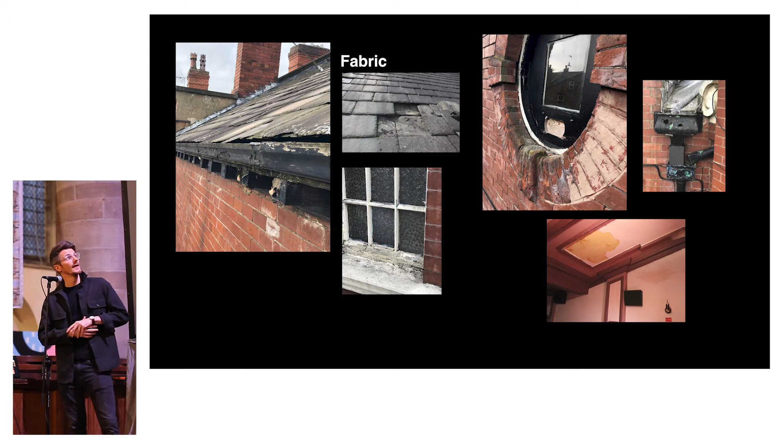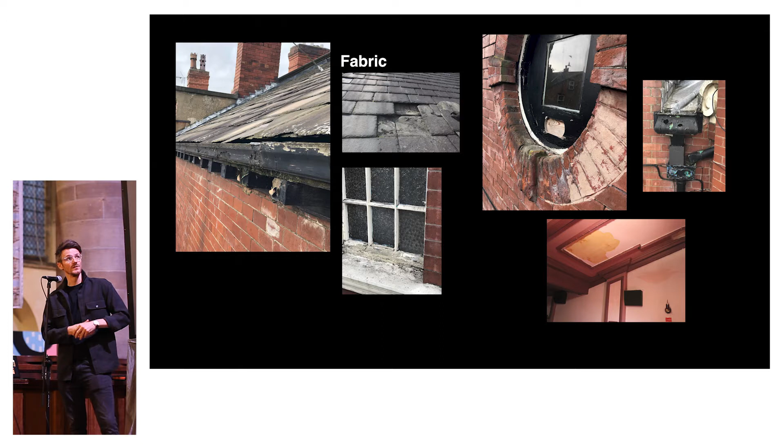They start to get a bit tired over the years, and no matter how well looked after the building is, or how much maintenance you do, parts of the built fabric are going to fail. So when the films are finished and the house lights come back on, it becomes apparent that there's plaster flaking, timber gutters around the roof starting to rot, leaky windows, cracks, and the cast iron rainwater goods starting to corrode. So we had to intervene to secure this building's future.

Above and beyond that, there's the question of comfort and the user's experience of the building. Although people love going there, it's thinking about the comfort of not just visitors, but the staff and volunteers in this building every day. It obviously gets freezing in the winter, roasting in the summer. Things like the uninsulated roof, the single glazed windows, and the outdated electrics, plumbing and ventilation need to be dealt with to bring it back into the modern day.

But fundamentally, what trumps all of this is the issue of access to the building. Hyde Park is not unique in this respect, but historic buildings just weren't designed to be accessible. It's easy to see that the picture house has a stepped main entrance, which isn't really acceptable in modern society — having people use different entrances just to get in if they have mobility issues or are a wheelchair user. So fundamentally, inclusivity and access is absolutely critical to the project, and that's what a lot of the redevelopment focuses around. But not just access into the building.

Once you're actually inside, things a lot of people would take for granted, like going to the toilet — in the picture house you have to go either down or up a flight of stairs, so it's obviously not ideal. Generally it is a cozy building, but that means it's small. The foyer space itself is tight for space. If you imagine quite a few people milling around the foyer, and you have access requirements or are in a wheelchair, it's not an inclusive environment if you're struggling to maneuver around the building. So fundamentally, this is one of the reasons we absolutely have to intervene with the project.

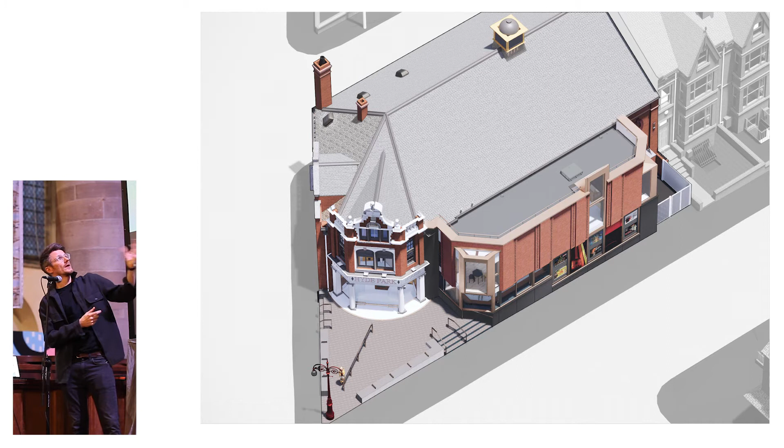So obviously there's work to the existing building that I've talked about — we need to look at the brick, the stone, the slate roof, and the lead work, all of that kind of stuff. But we're also proposing building an extension onto the side of the building on the Brudenell Road side, which is a 2-story extension above ground, with a basement level as well.

What you can see here is it's not just the extension we're building, but there's also key landscaping at the front of the main entrance to deal with the stepped access. Fundamentally, ramping the access to the front door of the building means we get level access for everybody to get into the building through the same front doors — democratic access.

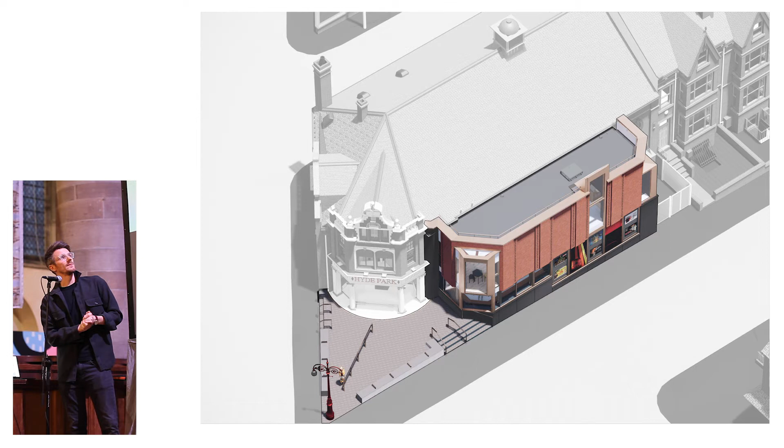The extension itself takes some cues from the existing building in terms of material and proportions, trying not to distract from the significance of the original building — that's the last thing we want to do — but trying to make this an appropriate piece of design sticking on the side of the building.

To take the lid off and look at the building on the ground floor, you can see the ramped access leads through a new glazed-in draft lobby, through the front door — these are all automatic opening doors — and you come into an enlarged foyer space. The way we're doing that is basically taking the rear wall of the auditorium and pushing it into the auditorium, sacrificing a couple of rows of seats for the benefit of increased space at the main entrance.

That gives us a bigger kiosk space for the staff and volunteers to work out of, but also allows us to fit in a new accessible WC in the foyer, right adjacent to the main auditorium, which was severely lacking in the original building.

We've also added a new acoustic lobby before we get into the auditorium, and the new ground floor of the extension adds additional spill-out space into the foyer, more space for people to spend time in the building without getting in the way. We saw the photos Wendy was showing of people queuing outside in the cold and the rain and winter — it offers a bit more space for people to actually spend time in the building.

Beyond that, critically important to the extension, you can see just beside the seating area that we have a new platform lift going in, which is going to give access to the basement level and also the first floor of the extension.

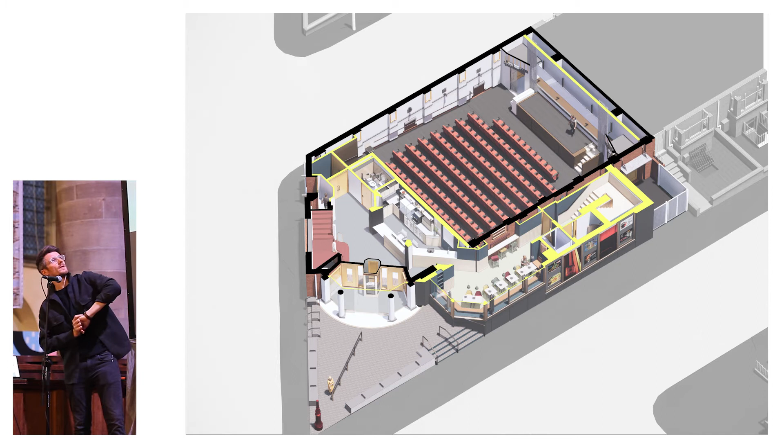You can see a yellow line at the front of the auditorium — that's a new acoustic lining to the front wall, which is a shared wall with the neighboring property. That's to increase the performance of the space acoustically, and it's going to be hidden behind the proscenium surrounding the cinema screen.

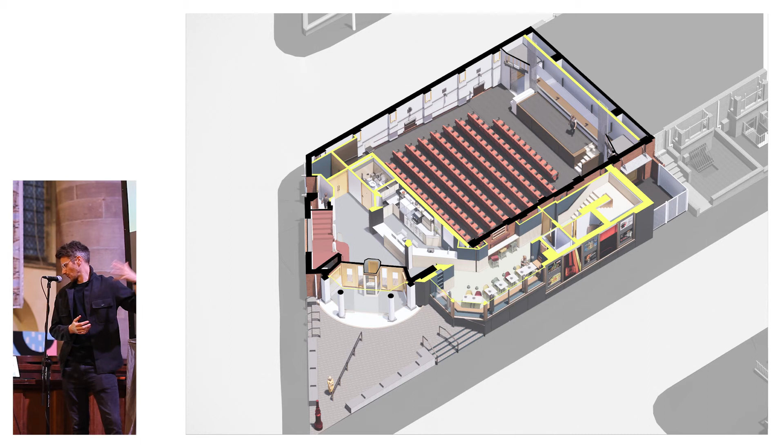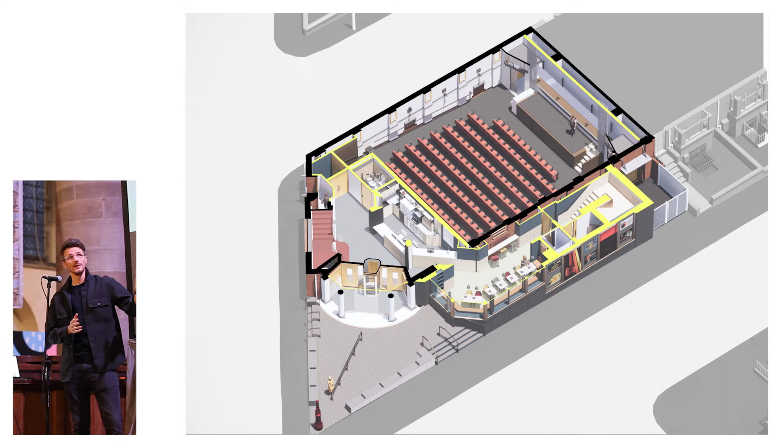What's quite nice to show in this diagram, something we're quite proud of, is that people can arrive at the building and go from the street right to their seat in the auditorium without having to touch a door, without any physical barriers — all of the doors from the main entrance through the acoustic lobby and into the cinema are automatic opening. It's really about opening up the building and letting people get to their seats without any physical barriers.

Jumping up to the first floor of the extension, there's a new public space at the corner, a flexible community space where they can hold other events, as well as additional toilets and storage space, with some nice feature windows looking out onto Brudenell Road.

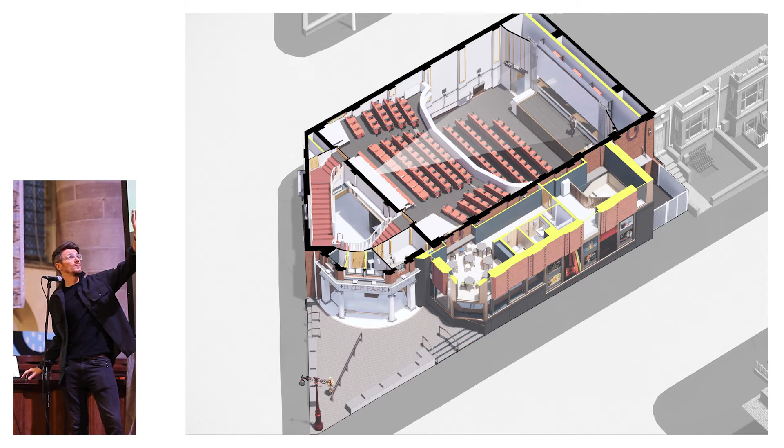Jumping down into the basement, one of the critical parts of the redevelopment project is excavating the basement to form a new second screening room, which is part of increasing the flexibility for the Picture House to have two screenings on at the same time.

This is a really specialist acoustically isolated box within a box, which allows two screenings to happen at the same time with the auditorium directly above.

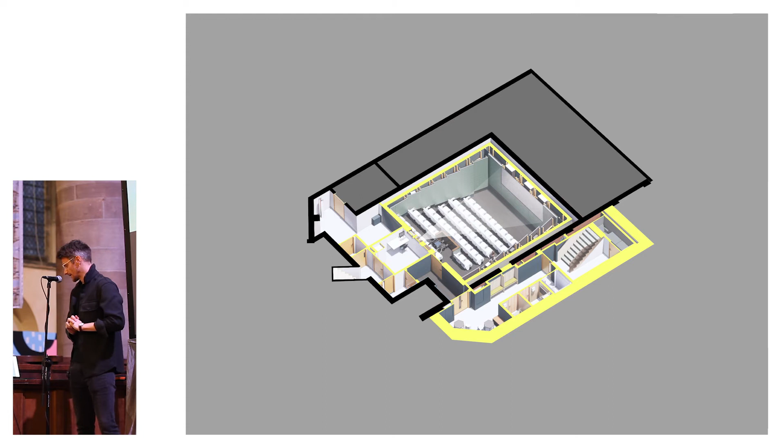What you can see here in the extension basement is that this platform lift will take you down into this new foyer space, a small waiting area with additional toilets and seating, and then you can come straight through into the new screening room with dedicated wheelchair spaces right in the center of the room.

Before I start showing some of the behind-the-scenes on site and construction progress, it's important to talk about how we achieve all these significant changes to this historic building without spoiling the charm, without spoiling this character that everybody loves.

As an organization working with the Picture House for various years, we're also very protective of it. The approach we need to take is one of care and understanding — we don't want to sterilize this charm whatsoever, or come in and impose designs that change the very nature of the building.

It's about addressing these really significant, familiar, recognizable aspects of the building, these quirky charms and leftovers from a previous era, like the fire hydrant in the foyer and the gas lamps, and all the little bits that really make the Picture House what it is.

At the very start of our involvement, as with projects of this nature, it was really important to understand the building as it was before we did anything to it. So a big part of that was architectural research into historic drawings, the original drawings for the building, historic photos, sketches, postcards, and anecdotal stories from people who knew the building historically, just trying to understand where the building came from.

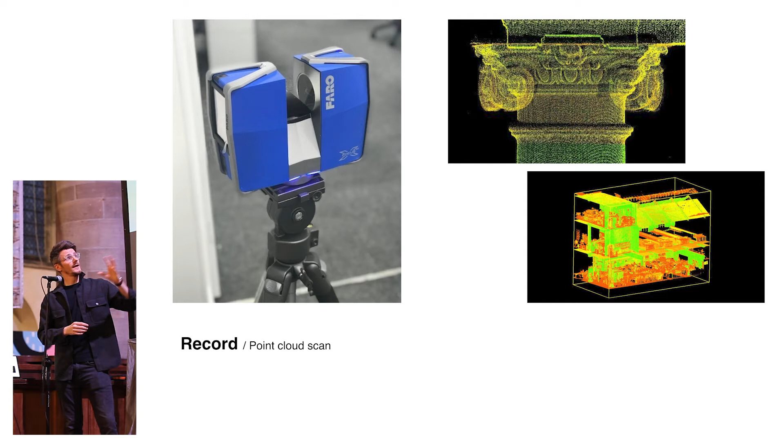Getting a bit more high-tech, we got specialists in to do a point cloud scan, basically a 3D scan of the building as it stands. They bring in these fancy machines on tripods that fire lasers everywhere, and it gives you a really detailed virtual model of the building to millimeter accuracy. This is important not only as a record of the building at a point in time, but it's also the basis of what we used as a design team to build a 3D model and a coordinated approach, inputting the new design information into it.

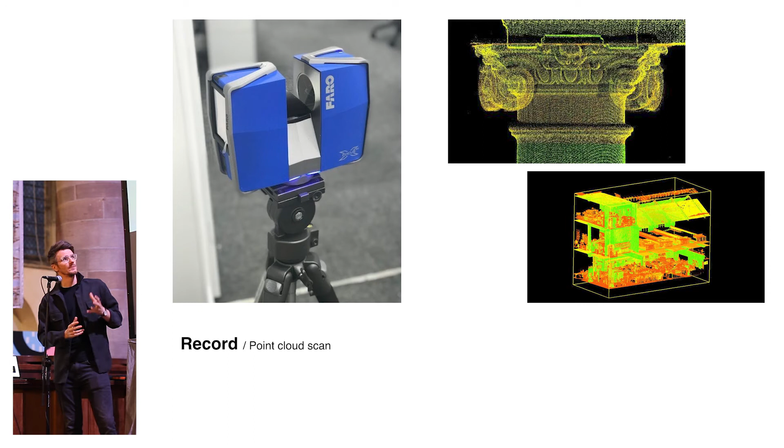Once we could actually start getting to grips with the building and understanding how it was constructed historically, we needed to piece together information on build-ups of walls and floors. As is the nature of these projects, some of this had to be intrusive, like the faience at the main entrance, which has quite a lot of cracking indicating structural movement underneath. This was a concern originally because we worried the steelwork underneath had corroded to a point where we'd have to replace a lot of it. Thankfully, we got local specialists in to take out one of these blocks and look at the steelwork, and it's not as bad as we thought it was going to be.

Some of these blocks underneath the Hyde Park sign will need to be replaced, but we're working with local specialists who are producing samples to get as close a color match to this historic faience as possible, so we can stitch it in without it being obvious.

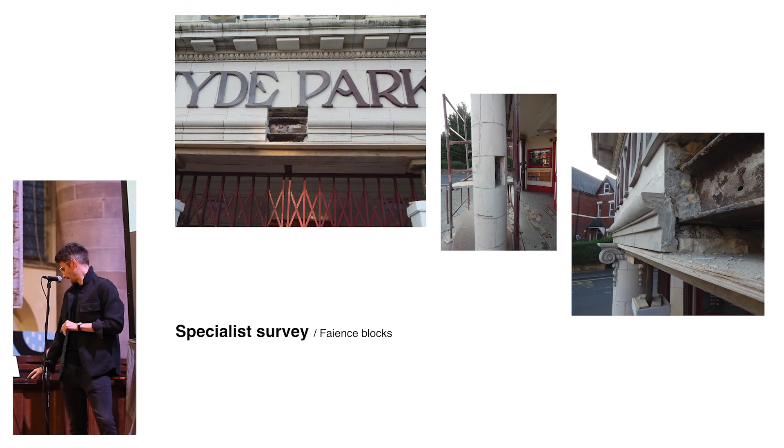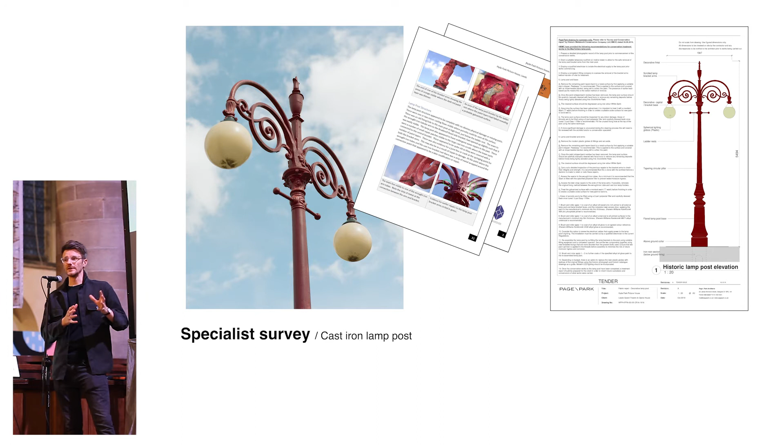Beyond that, there were a number of other surveys, including the boring stuff like asbestos surveys and timber rot surveys to understand the building. One interesting aspect, as Wendy started to talk about, was the cast iron lamppost. We got specialists in who produced a thorough 50-page document outlining all the little bits that need to be repaired and redecorated, giving us a clear idea of how to address this iconic piece of the Picture House. It's one of these aspects of the building that probably looks fine from street level, but whenever you get up close, it's really in need of intervention.

Just before I get on to progress, one of the last surveys we had done, which is always enjoyable to share, was a paint sampling survey of the building. Specialists came in and took about 40 to 50 paint scrapings around the building, all around the key spaces in the foyer, the auditorium, the lamppost, the external windows, everything like that. They take these paint scrapings, then take a cross-section and look at it under a microscope.

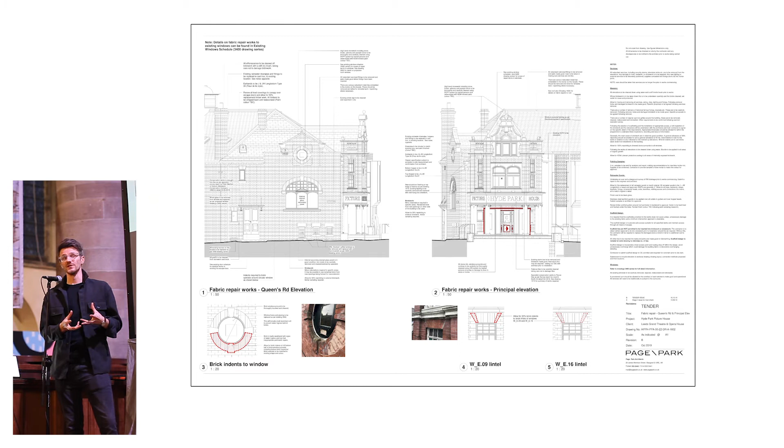So basically, all these surveys that we did, all this research and consultation with the client and with the public and heritage bodies and the planners, it's given us a really robust set of design information, both architecturally and with all the engineers and all the specialists, acousticians and everything. It's given us this set of information that we can then hand over to a contractor.

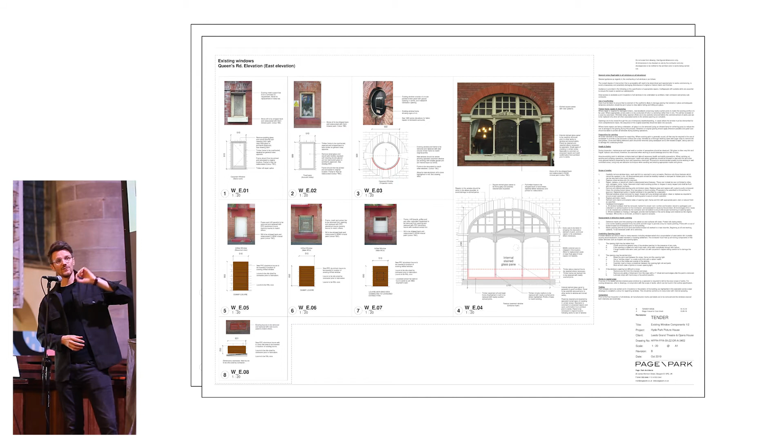And say exactly every little piece of work that needs to happen to this building, every window that needs repaired, every bit of brick and slate and lead work that needs to be replaced, every single little miscellaneous feature of the building that doesn't really fall into any category, but it needs to be addressed, making sure nothing is thrown out or damaged, making sure it's all protected or taken off-site during the works to then be brought back. Was a really, really critical part.

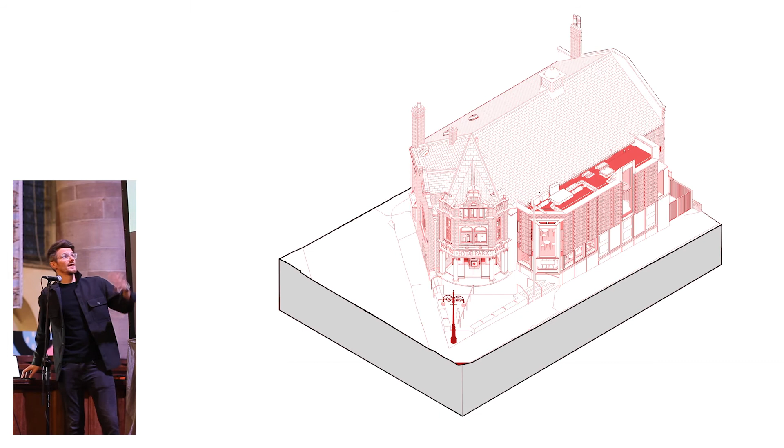And as I say, we have this really intelligent 3D model that all of the consultants are inputting into, including the engineers. So they've got all the new steelwork and concrete piles coming into the building. And it's a way of us all coordinating everything to make sure everything is millimeter perfect and where it needs to be in the construction.

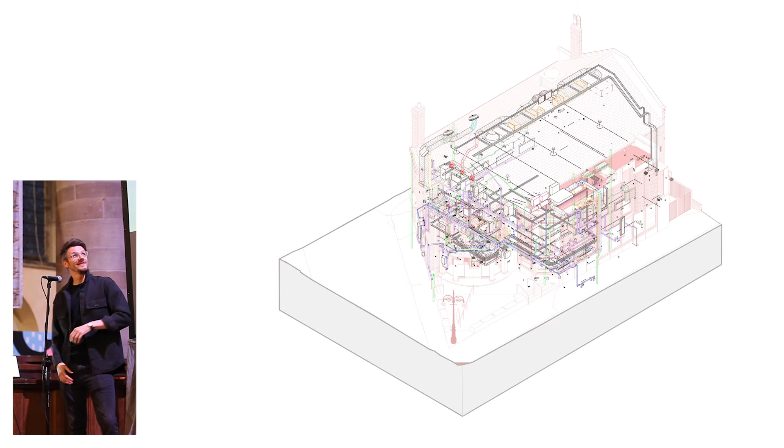And this is pretty amazing. The services engineers have basically modeled every radiator and light switch and vent and duct and everything that is going to go into the building, everything that's getting replaced from an engineering point of view has been modeled in this 3D model. So it's a really useful asset as a design team.

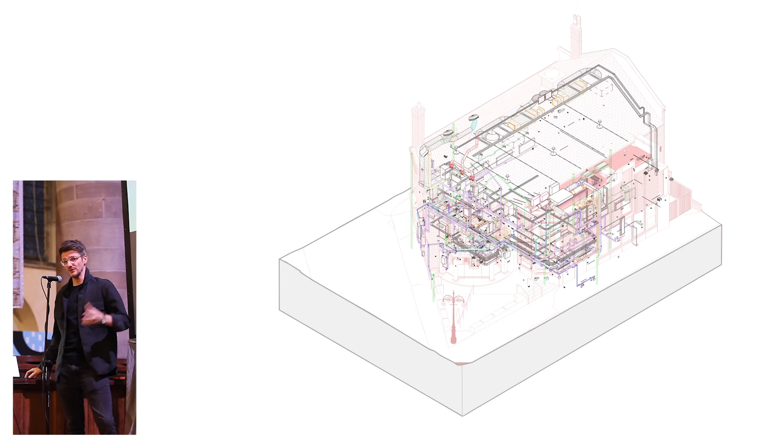So onto the progress so far then. I think a lot of this has been shared on social media, but not everybody will have seen some of these. There's a few behind the scenes photos that people won't be aware of.

As Wendy said, this project's been a long time coming, not just over the past 5 or 6 years from our point of view, but from the picture house's point of view. This has been a long time coming even before that. COVID kind of held things up a lot, but even just seeing stuff start to get stripped out of the building was really, really exciting for us.

And even in the first few weeks of the project, just seeing the seats getting removed was really exciting because we knew it was happening. We knew the ball was rolling and there was no turning back.

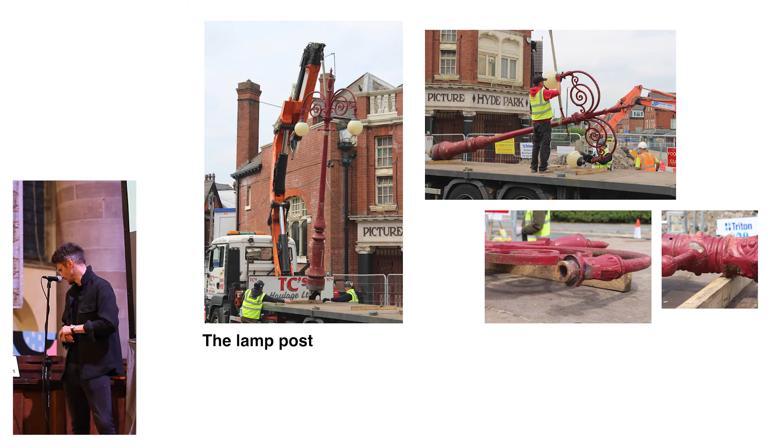So if anybody has wondered where it's gone, it's been taken away to some specialists in Shrewsbury who are going to take really good care of it, strip it back, make all the cast iron repairs where necessary, and it's going to get new wiring inside. It will still be a functional light and reinstated exactly where it was.

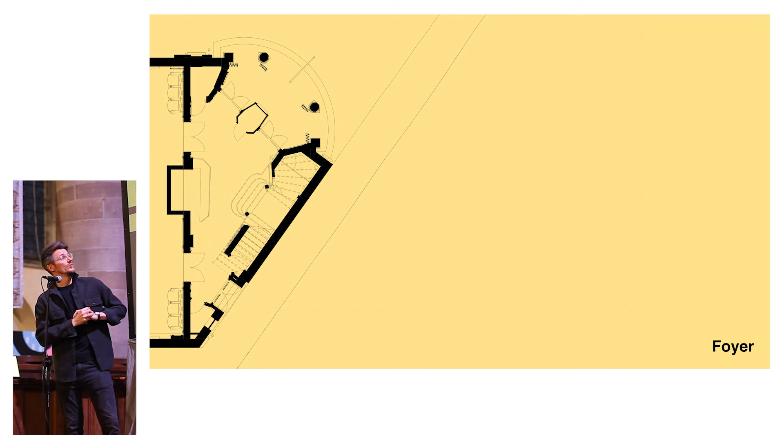So I'm going to run through the three or four key spaces of the building and progress to date in those. Initially, just to talk about the foyer briefly, there's not a huge amount that's been done in the foyer so far, but enough that it has become a very different looking space.

Unfortunately it's underneath a layer of vinyl tiles that have been industrially glued to the terrazzo, so it's going to be quite a job to get all of that off, but it'll all be stripped, and then the terrazzo is going to get ground and polished by a local specialist, which will bring all the color out of it and give it a nice finish. It will probably be the first time this terrazzo has been visible in close to 100 years, I imagine, so that'll be really, really exciting.

Similarly, the timber stair you can see there, which was fully carpeted, there's evidence that this actually had a central carpet runner going up the middle of it, potentially with nice stair rods as well. So we're looking at possibly reinstating that, highlighting the importance of this feature stair.

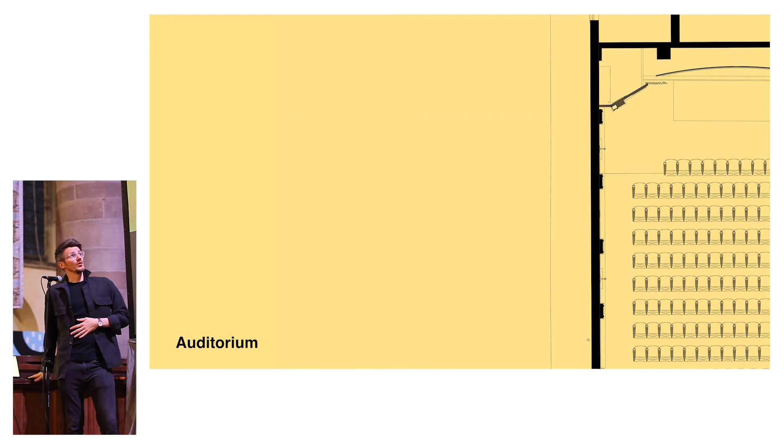As I say, the first few steps were just getting all the stuff out of there, everything that wasn't screwed down, and a lot of stuff that was screwed down - just getting it out of the room, lifting the cinema seats and the carpets and stripping everything out.

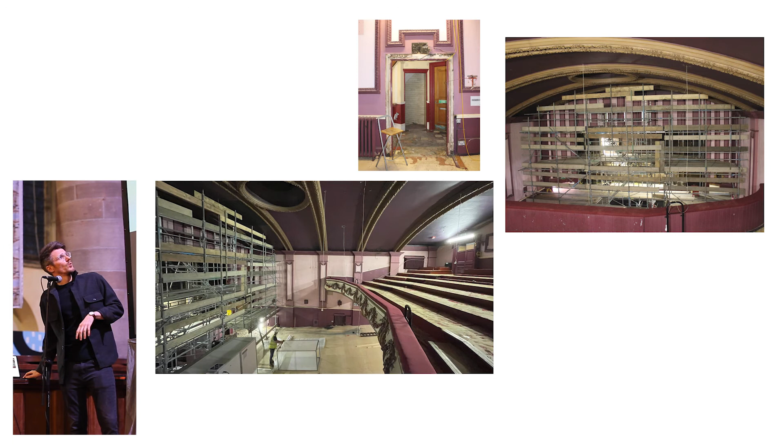But one of the key bits of work that happened in there first was part of the asbestos removal. The asbestos survey early doors highlighted that the proscenium arch around the cinema screen, this striped wall that surrounds the screen, had some panels that contained asbestos, so that had to come down anyway. And in order to do the new acoustic lining to the front wall, this all had to come down too.

But once that did come down - what we did anticipate, we knew there was ornate plasterwork behind this proscenium, really nice festoons and cherub faces and decorative plasterwork. We were aware that was there, but it was really hard to get a good look at it, because obviously with the curtains and the cinema screen. So getting the cinema screen down for a start was quite exciting to start to get glimpses in there.

But then whenever the proscenium itself came down, it unveiled a big surprise for us, which we didn't anticipate. There was an even earlier proscenium that the latest proscenium had been built on top of, and there was no evidence of this from poking your head around the back - it was a complete surprise to everyone involved. It was really, really exciting to see this, because it's obviously from a different era. Looking at the designs, it obviously has these Art Deco motifs to it.

It's got these geometric lines, but it's quite interesting to see this in direct comparison with the original plasterwork on the front wall, and some of the parallels in terms of design. We suspect this was probably introduced around the 1930s, but it's not in great condition. It's already been sliced at one side, so it's a bit asymmetric at the minute, and it's obviously been damaged around the base. So it wasn't terribly well constructed, but really fascinating to see.

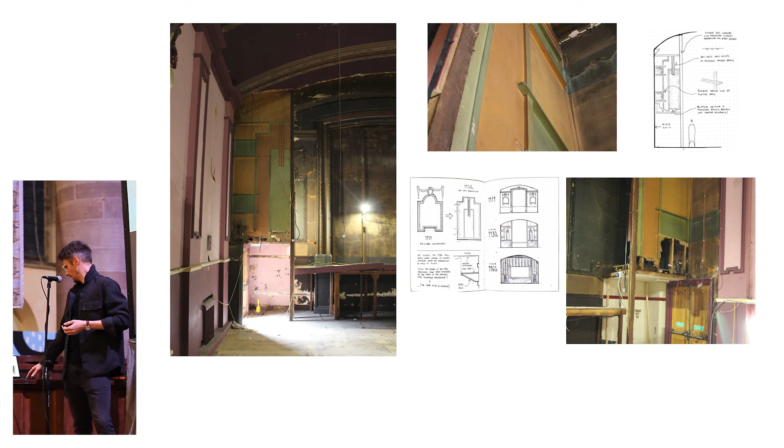We took a lot of interest in this, just because it was so surprising. We got the archaeologists out, took hundreds of photos, assessed it, and structurally it wasn't great. It's this rickety, poorly constructed proscenium, which made us think it was maybe a cheap and cheerful addition to the picture house back in the day, possibly to conceal the introduction of new speakers and audio equipment, because it's quite awkwardly spanning directly in the middle of the fire exits, in a bit of an awkward position. But interesting to say the least.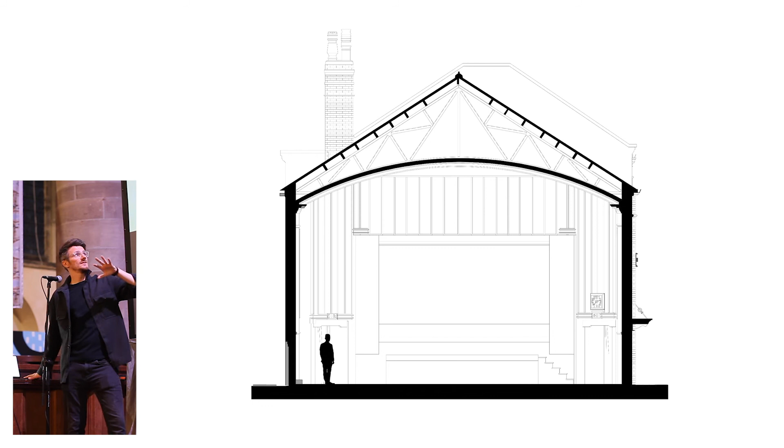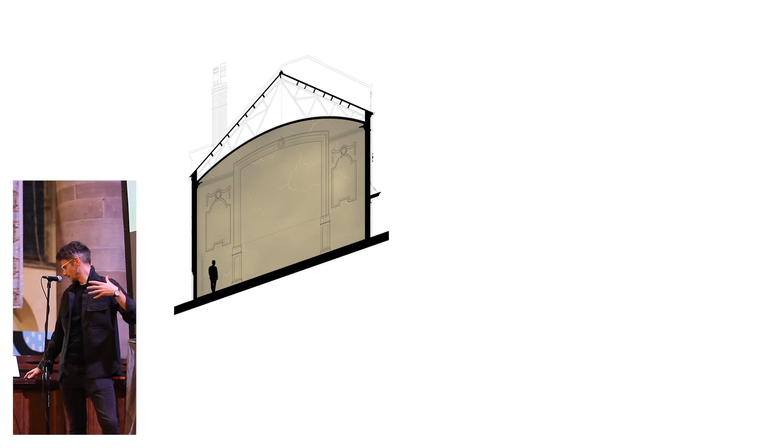There's a few diagrams that are interesting to look at, showing how the various layers of these prosceniums relate to each other. This is the proscenium everybody's familiar with, which we suspect was introduced roughly in the 60s, compared to this potentially 1930s fragment of the proscenium, and then the original front wall of the projection wall. It's quite interesting because this has been covered for decades, and nobody's really ever had a chance to see it in full.

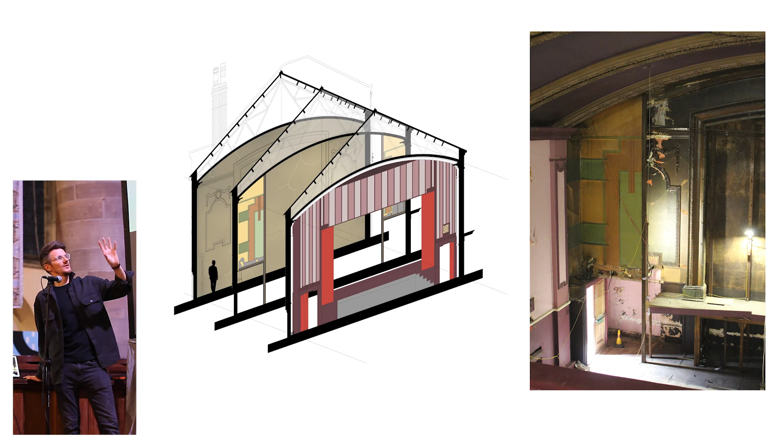Especially, it's rare to see this in direct comparison in real life—you can see the various color schemes in direct comparison. These are just some of the site photos we take on a daily basis, but there's something poetic about seeing these moments in time that have just been frozen and added to. But it also highlights how ruthless they were back in the day with the decorative, ornate plasterwork. I suppose if this was introduced in the 30s, the building was only about 15 years old, so they probably didn't think too much of slicing through this and building a new proscenium. But it is quite heartbreaking to see the original plasterwork in a condition like that.

So that's just showing the latest proscenium, the 60s proscenium, the one everybody's familiar with, is going to get reinstated in a like-for-like manner. It'll be visually exactly the same as everybody remembers it. The acoustic partition behind that will be hidden, and that's going to basically cover the ornate plasterwork and protect it for the foreseeable future. There's ambitions of, can we unveil this ornate plasterwork, but it's all down to acoustics and ownership of property and things like that. So it's there as a future ambition, but for the time being, we're going to encapsulate this. It's a freestanding acoustic partition, so nothing's getting fixed into that wall—it's being protected as it stands.

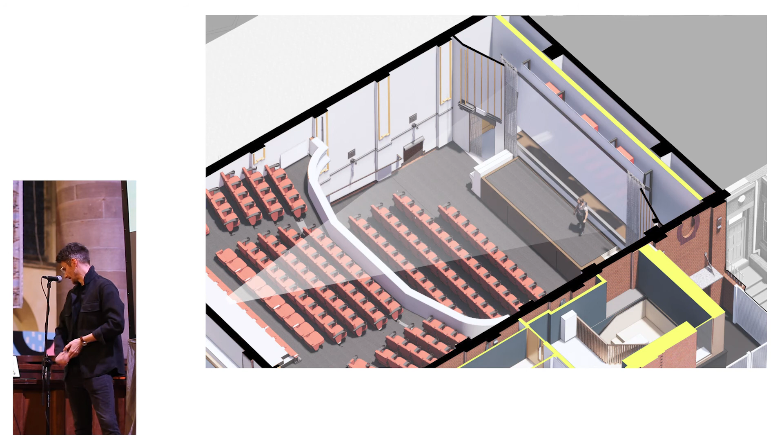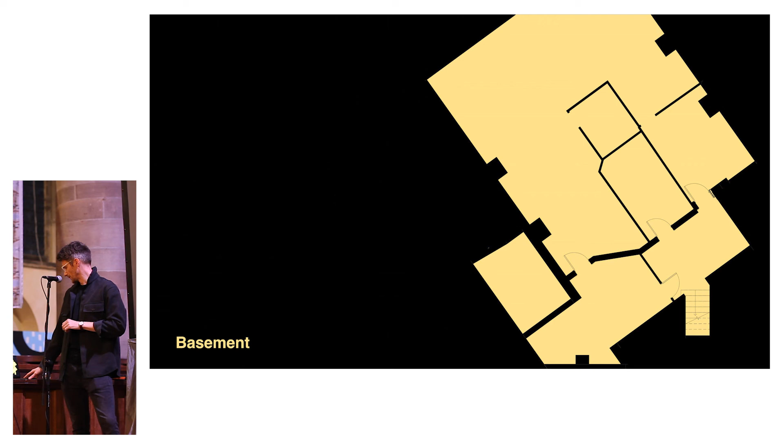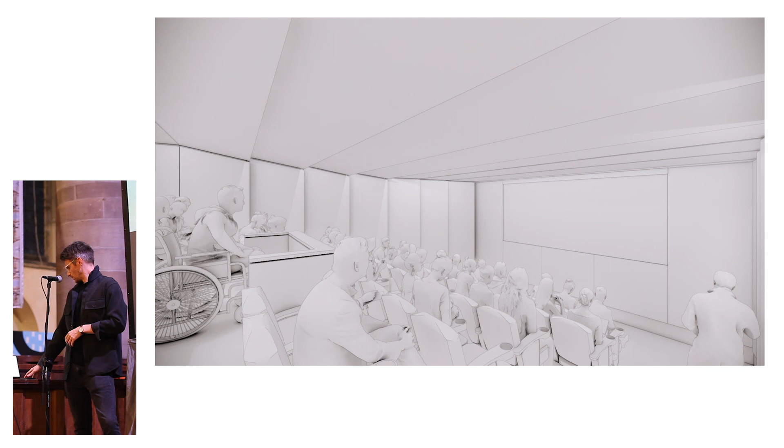It's a good time to bring up the fact that this basement, not everybody's aware, is believed to have been built for another building which was never then built above ground. The picture house was built on top of this basement that wasn't really designed for it, which is why it's slightly at odds with the architecture above ground. You've got these really industrial steel beams, riveted beams, and big chunky brick piers on the side, and these street level light wells going up to Brudenell Road, which is a bit different from the architecture above ground.

Actually, one of the discoveries just on site this morning that we weren't aware of, and I don't even think Wendy is aware of, is that we've removed an old water tank that was in the basement and found a coal chute coming up from Pearson Grove. These are the little things nobody had any idea of, but they're really interesting to see.

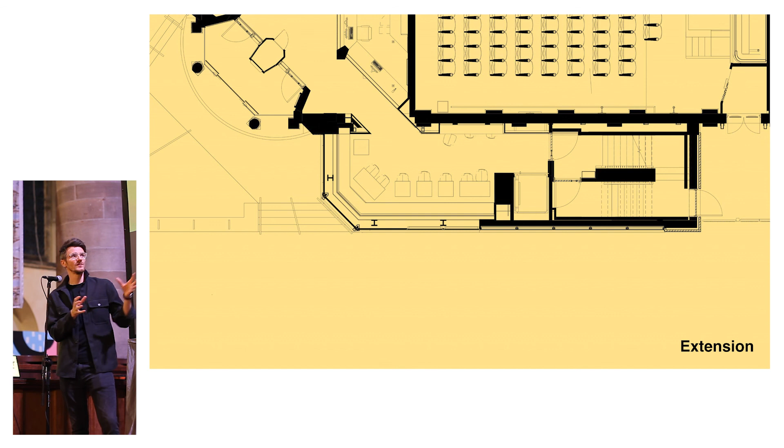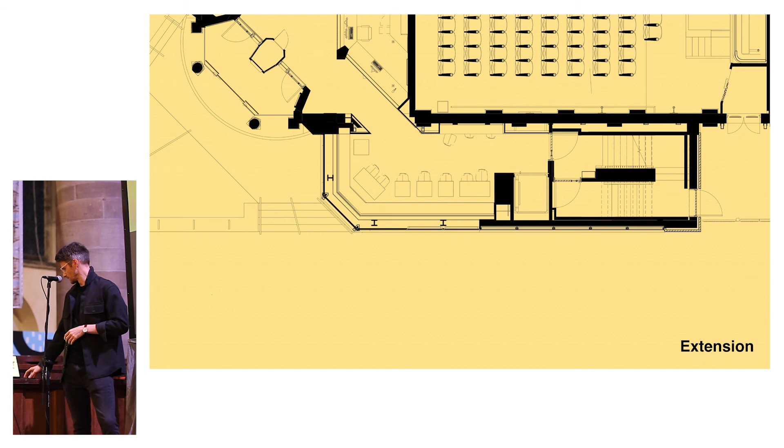Just to finish up, I wanted to briefly talk about the progress of the extension externally, because anybody walking past the picture house has been able to see into the site. For a long time it was just a hole in the ground or a pile of mud, but there's been some really good progress over the past couple of months.

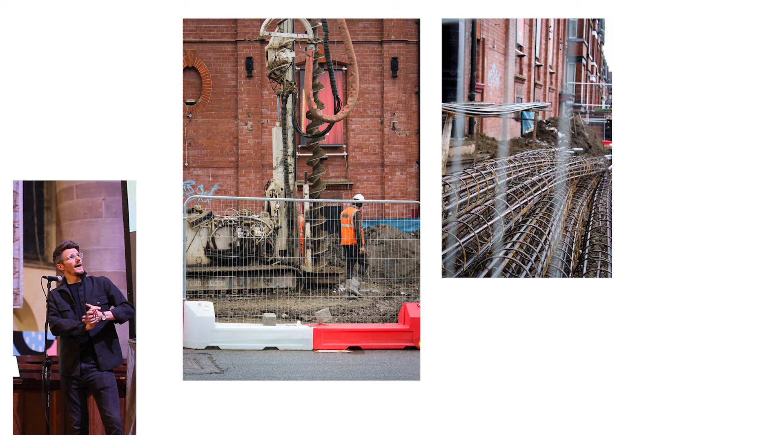One of the most exciting days on site was when the piling rig arrived. This was basically boring big, I think 6 meter deep bores into the ground and filling them with concrete and these big steel reinforcement cages. It basically forms a retaining wall structure for the basement and sets a really good foundation for building all the new structure on top of that.

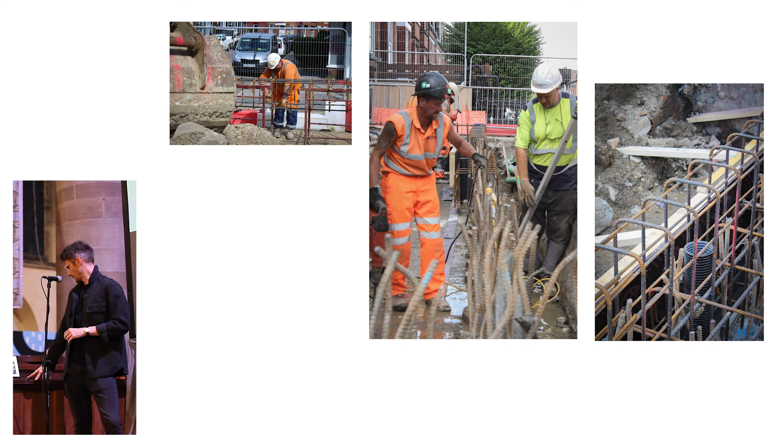So once they had worked out all the reinforcement and structural requirements, it starts to look like this, which is really exciting because you start to get a sense of the scale of the basement. This is only halfway excavated, so there's another 2 meters of excavation to go, but it gives you a sense of the extension's footprint, which is really exciting to see.

What you can see here as well are some remnants of the original basement that was built, and you can see that it's slightly at odds with the building above ground. These are the light wells that you could see going into the basement.

Over the next period, we'll start to see the steel frame growing out of the ground from this really good foundation we've built. Early next year we'll get more hands-on with the specialist conservation works to the existing building, the slate works and brick and all the really special internal elements of the auditorium. That'll start to get looked at next year, and if we're on track, this should finish late summer next year. I think July, August is the target at the minute.

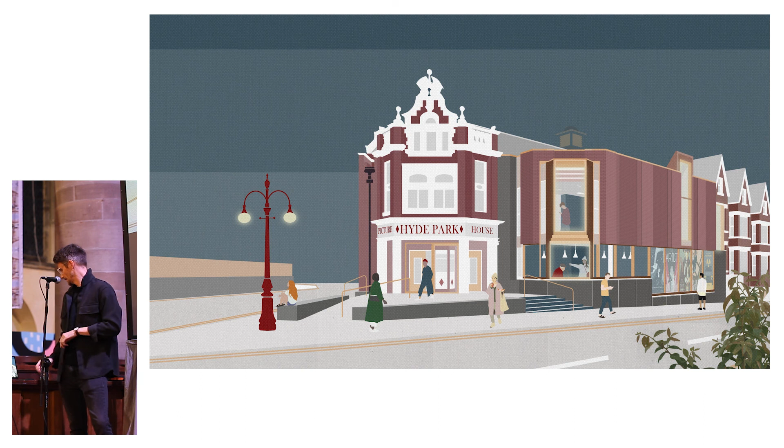I'm sorry I didn't have any photos of cats, but that's the best I could do for now. So thanks for your time.